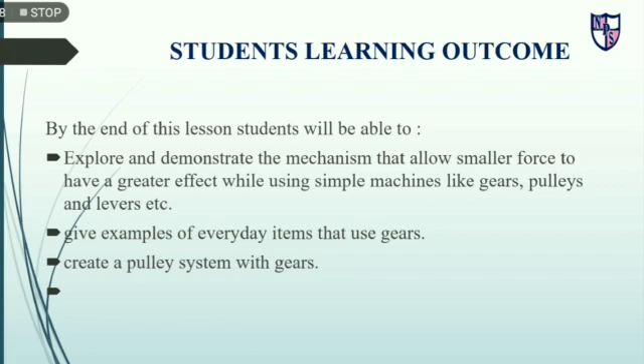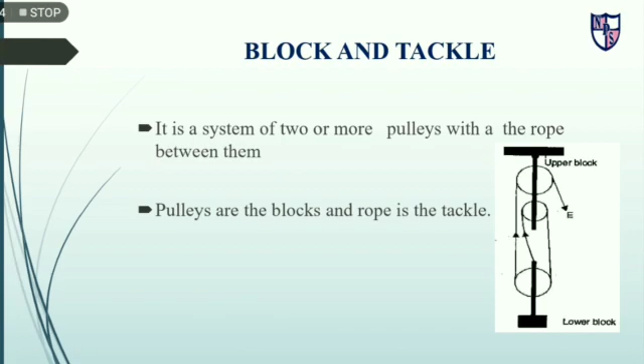Now let's discuss the block and tackle system first. It is a system in which two or more pulleys are present along with a rope. Pulleys here are called blocks and the tackle is the rope. The rope is passed between these pulleys. Here you can see in the diagram of the block and tackle system that three pulleys are present and the rope goes under these pulleys.

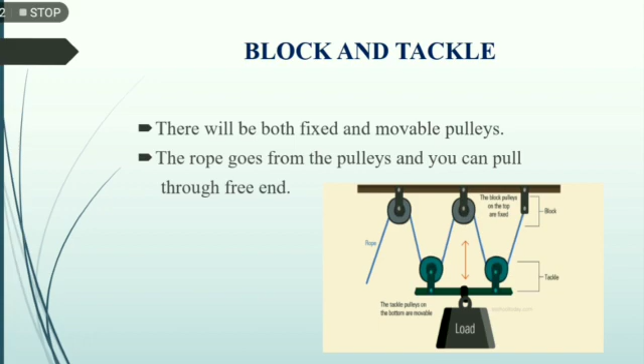However, the 2 at the bottom are the movable pulleys, and a heavy weight is attached to these movable pulleys. One end of the rope is free, from where you pull the rope. When you pull this rope, the movable pulleys go upward and the weight is also lifted along with these pulleys. So in this way you can move or lift the load.

Now you might be thinking, what is the purpose of using many pulleys in a system? So students, you need less power to move the object when you use more pulleys. This block and tackle system increases the lifting force. It means the force of lifting the object is increased when you have more pulleys, and you can lift a heavy object by applying very little force.

For example, if you have 4 pulleys in a system and a 40 kg load, then the effort you need to pull this load is exactly the same as you would need to lift a 10 kg load. It means using 4 pulleys will increase the lifting force 4 times.

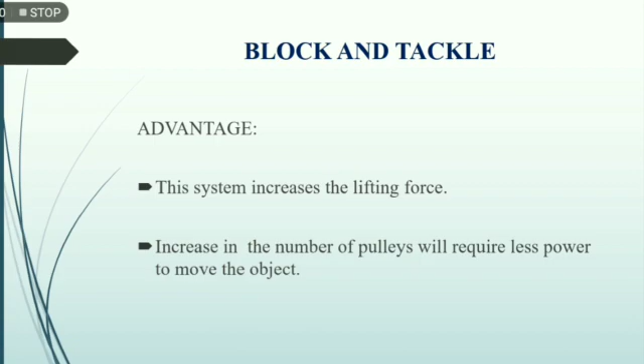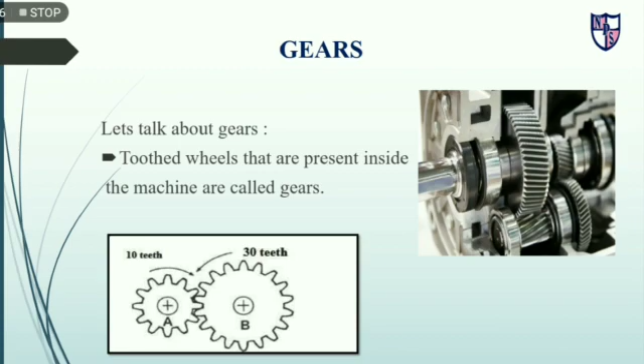Now let's talk about gears. What are gears? Gears are toothed wheels that interlock to form simple machines. Here in the picture you can see that they are wheels having projections or teeth. In simple machines, a gear is linked with another gear. This helps to pass on the motion of the machine from one gear to another.

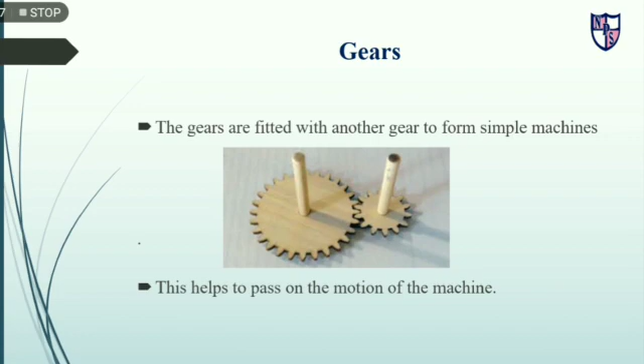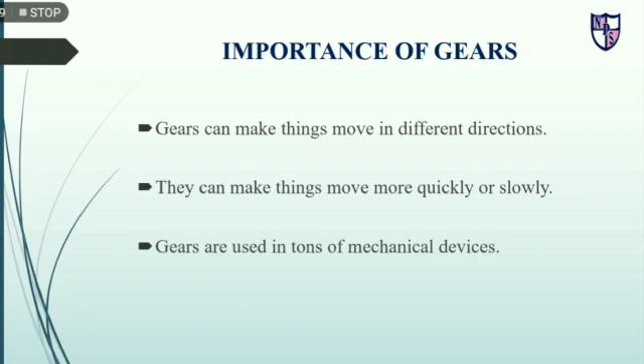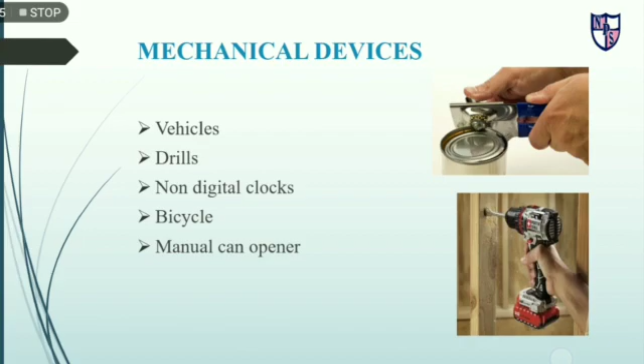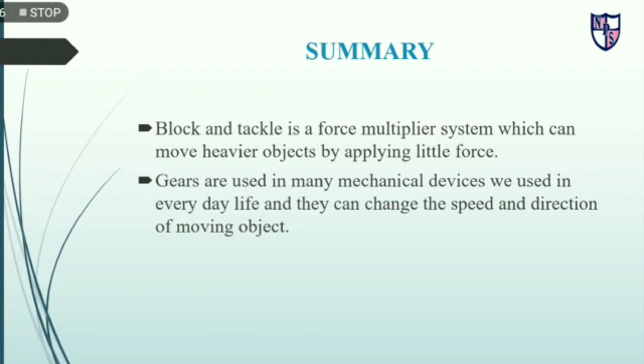Now let's have an overview of this entire session and see what we have understood in this class. Block and tackle is a force multiplier system which can move heavier objects by applying little force. Gears are used in many mechanical devices we use in everyday life, and they can change the speed and the direction of a moving object.